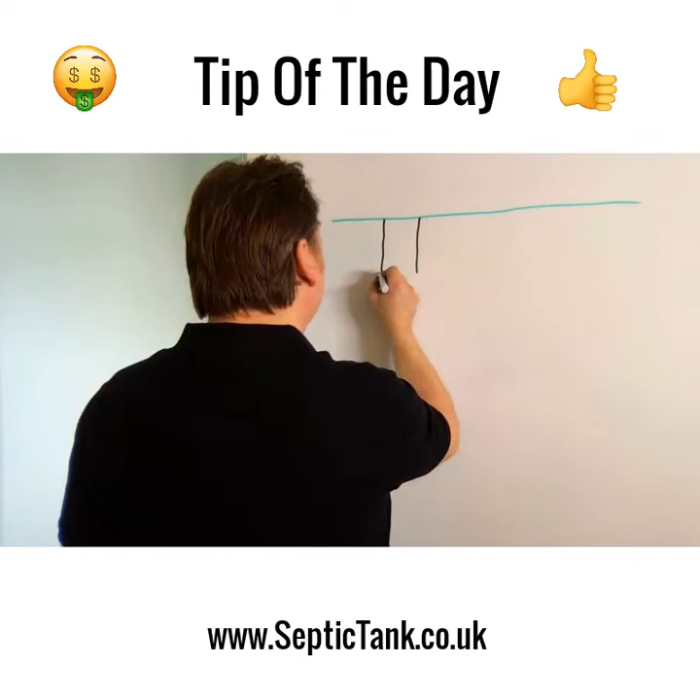Now let me show you this. Pretend that this line here is the grass, the ground that you stand on, okay? Now there's two types of septic tanks in the UK market. You probably recognize this one - that's called an onion shape septic tank. Now this one, probably recognize as well, it's called a bullet shape septic tank.

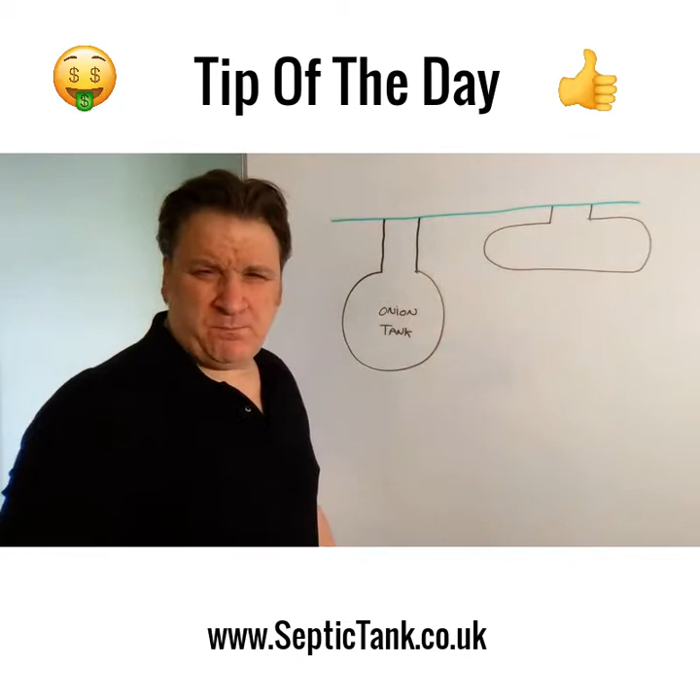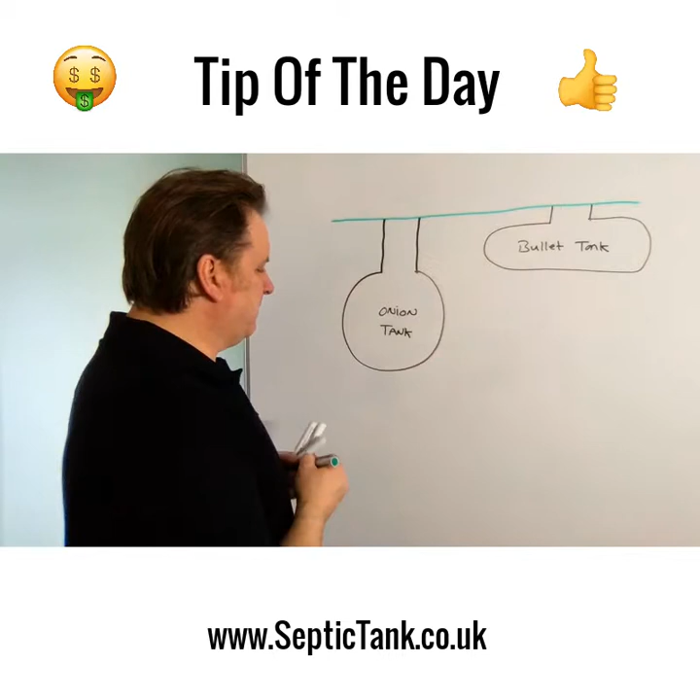So now let me show you the pros and cons of each of these tanks. Now this tank here, the pros of it are that it costs about 150 quid less than the bullet tank. So let me write down the pros. So it costs about - well, let's say, because prices can vary, but let's put this in perspective - up front it costs a third less to buy. No doubt about that, they're cheap to buy because they're made of fiberglass, so they don't cost a lot to manufacture. So that's one of the pros.

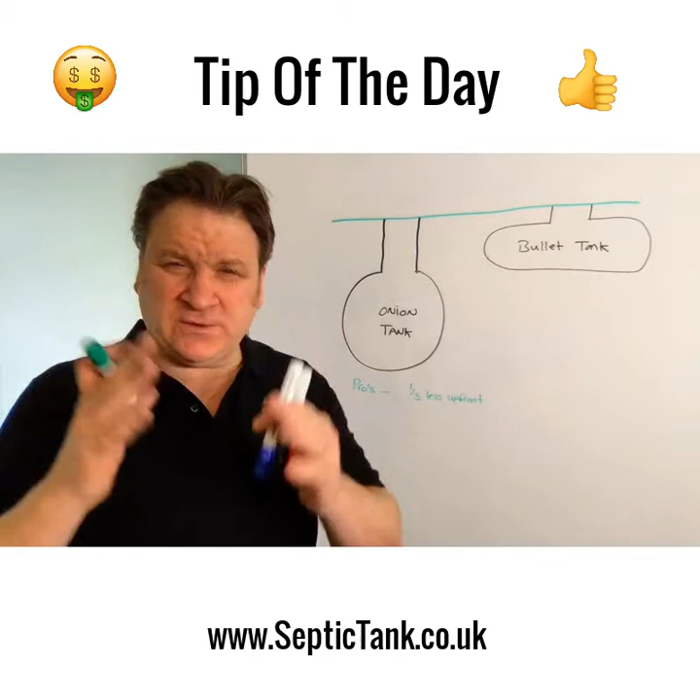And that is about it. I'm not kidding, and I'm not being biased here in any way, shape or form. So someone who's on a budget may think, okay, I can save myself 200 quid here, 300 quid, maybe 400 quid by going for a cheaper tank. Sorted, that's good, that's money. But it's false economy - let me show you why.

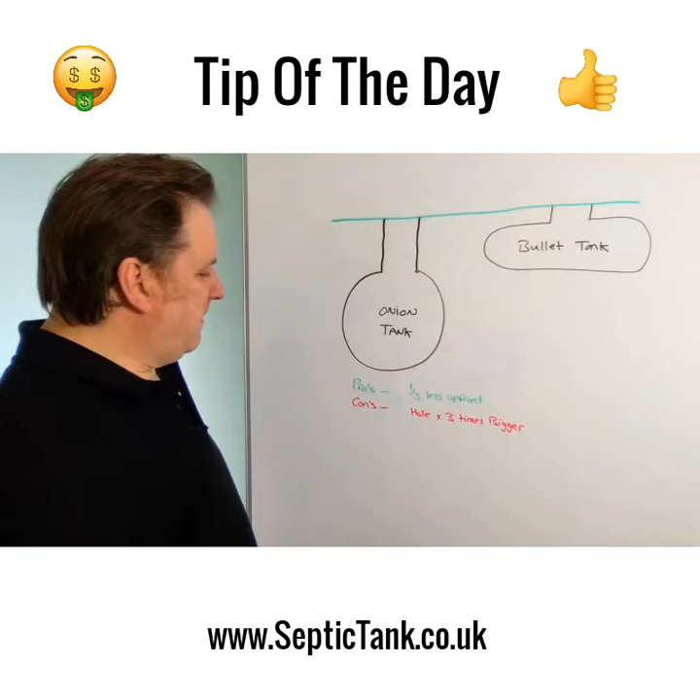Even though these are a third less to buy up front, the cons far outweigh the couple of hundred quid that you're going to save up front. The cons are: the hole is 3 times bigger, 3 times deeper.

So that means you've got to hire a digger. So for the bullet septic tank, you could get a small digger - a 1.5 ton digger, 3 ton. For this, you've got to use a 3 ton, a 5 ton, or a JCB. So suddenly that 200, 300, 400 quid you saved, now you've got to pay an extra 150, 200, 300 quid to get a bigger digger in.

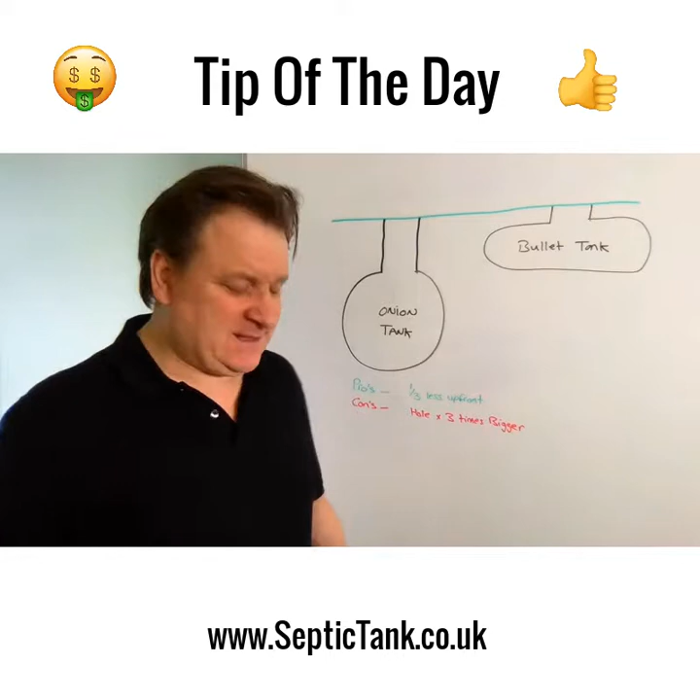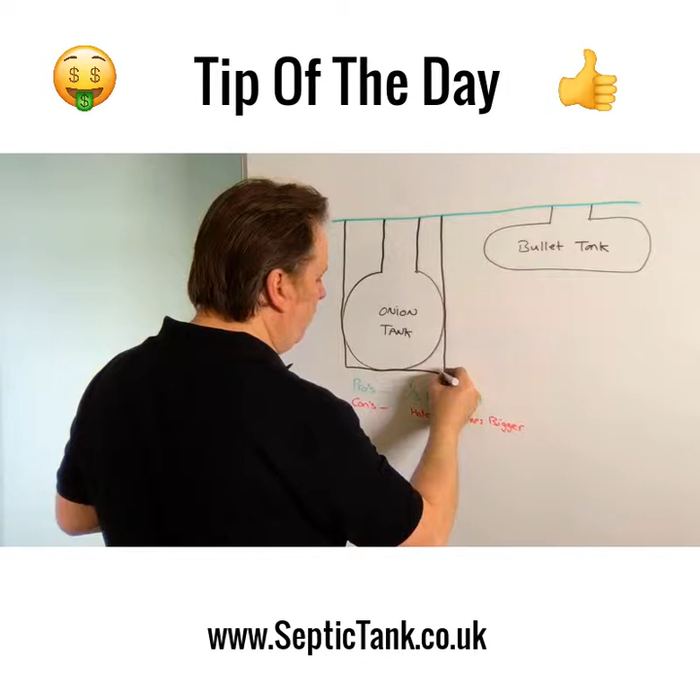But it doesn't end there. On these onion-shaped septic tanks, there's one thing you have to do with all of them, or the manufacturers will not warranty them - you've got to backfill them with concrete. Unless you do that, the manufacturers won't warranty them, and they're a pig to put in.

So let's say it takes 2 to 3 days to get one of these in as well. Now, to backfill with concrete can cost you anywhere from - flipping heck - 400 to 800 quid.

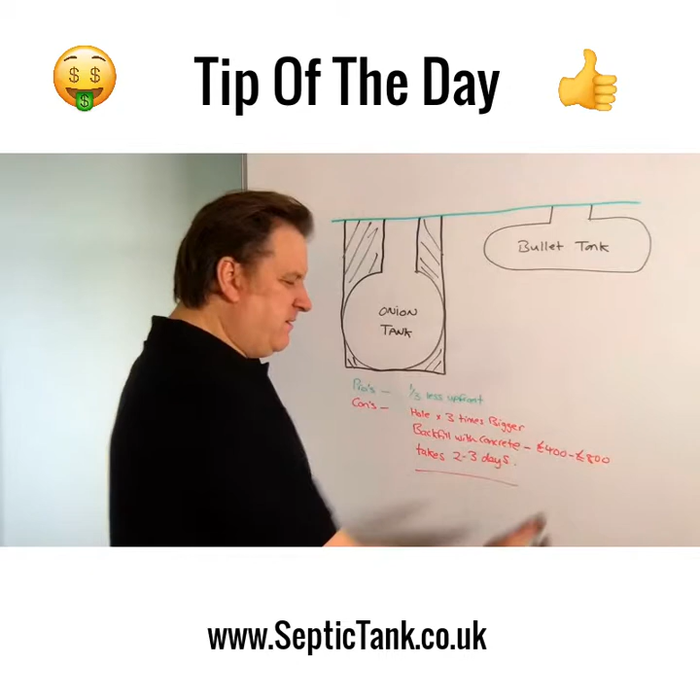So suddenly that 200 or 300 quid you've saved up front has now disappeared - it's been eaten into because suddenly you're paying out, let's put a mean average here, let's say 500, so suddenly you're paying out another 600-700 quid that you wouldn't have had to pay. Okay, you've saved 300 quid, but you've still paid another 400 quid on top of that.

So let's put that in perspective for you. Let's say this tank has cost you - let's compare the prices of both tanks - let's say this tank is going to cost you 899 quid, and let's say the onion equivalent is going to cost you 599. So that's an immediate saving of 300 quid.

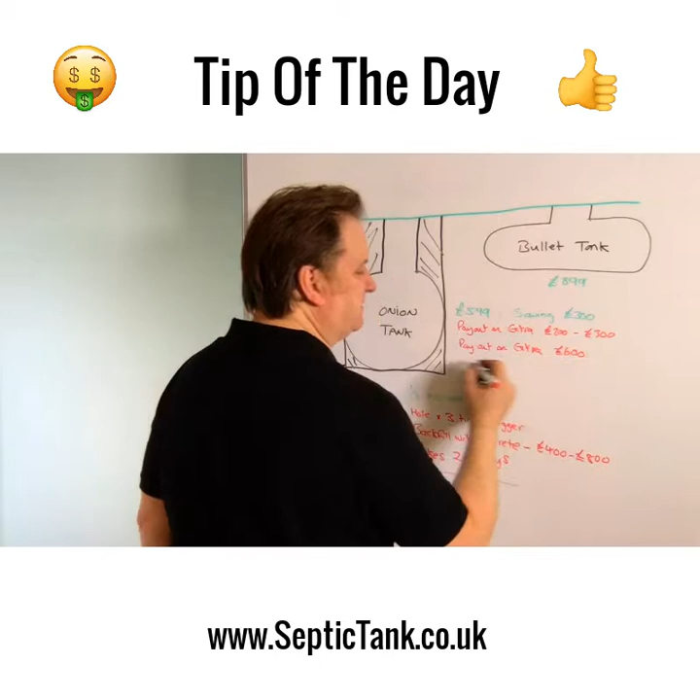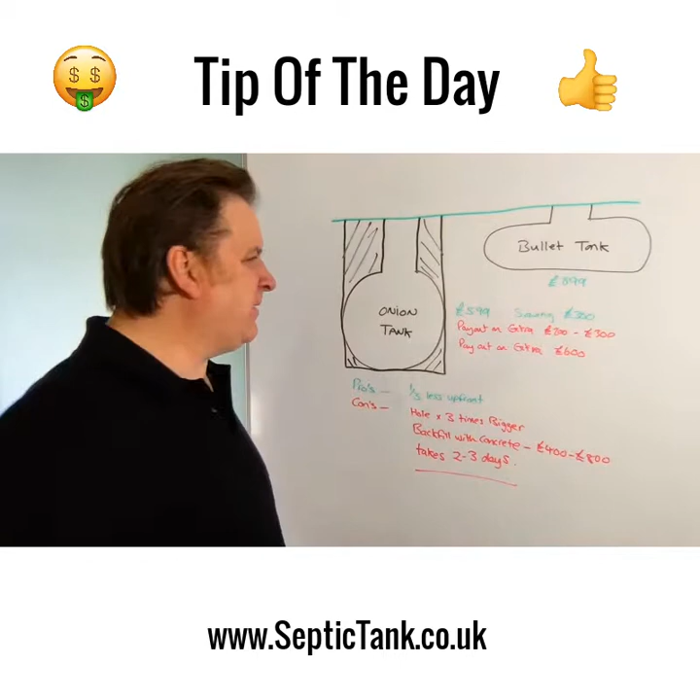That's not including the extra day or two of labour and all the hassle and costs of trying to install it. Now on the bullet tank, it's cost you 899, which is 300 quid more, but let's look at the pros here.

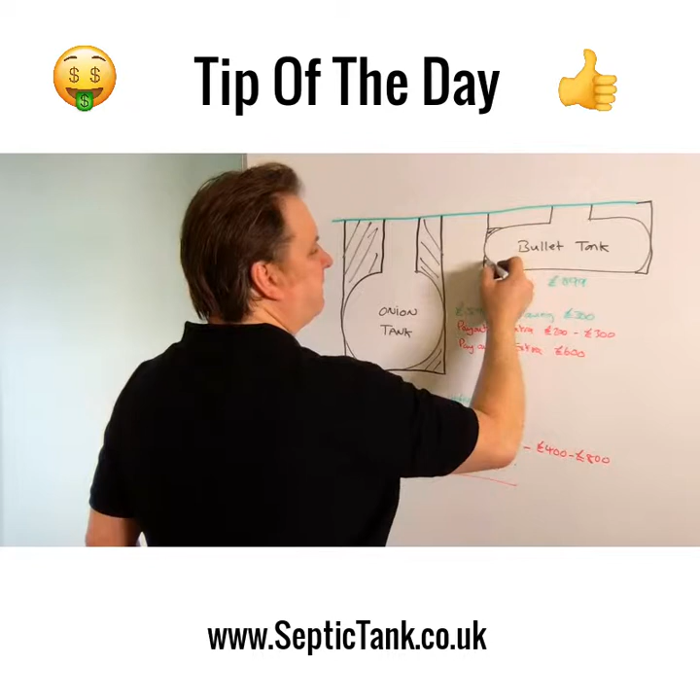Let's look at the pros. Number one, you only need to backfill with a few ton of gravel or shingle, that's all you need. Number two, it's two-thirds shallower than the onion tank.

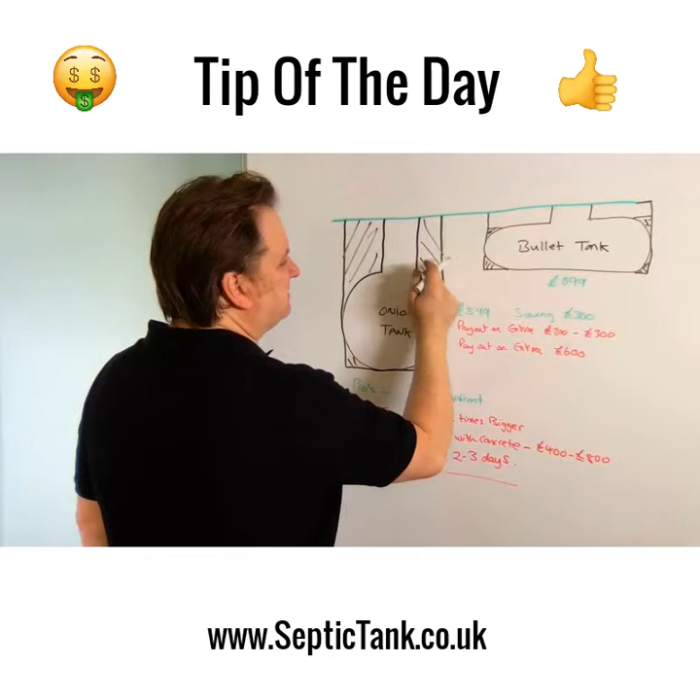Oh gosh, here's another one I haven't told you about. With these onion tanks, because it's so deep, the soakaway has to literally start a minimum of 3 to 4 feet below the grass. Man, the complications. It's bad enough having to go 2 foot down in the ground with the soakaway, never mind 3 to 4 to 5 to 6 feet.

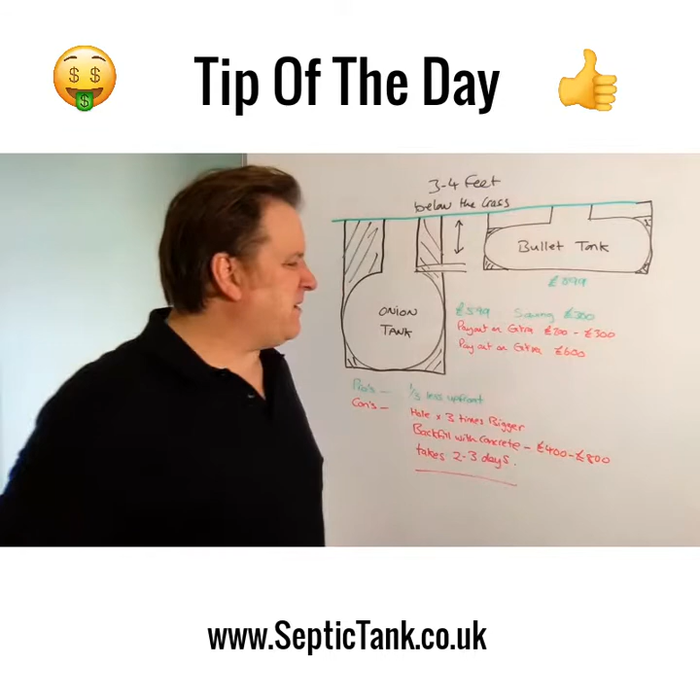And this is just a small to medium-sized onion tank. Once you start going deeper and deeper, the resistance gets mad and the bigger the soakaway has to go. So what I'm saying is that initial 300 quid you may have saved will cost you anywhere from 600 to almost £2,000 in additional costs because of the extra depth you've gone to put your soakaway in. Whereas on the bullet tank, the inlet pipe and the outlet pipe are relatively shallow, so the soakaway can start shallow in the ground.

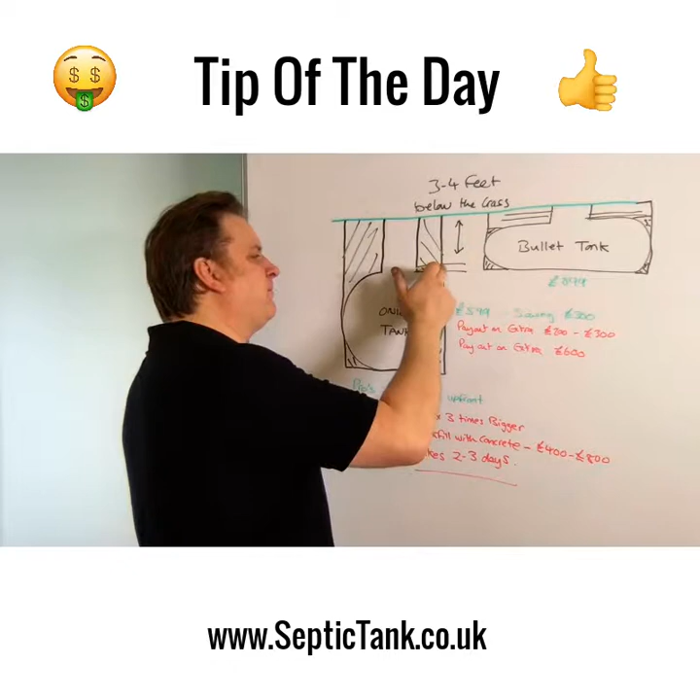So if you want a tip, don't think about that initial 200 to 300 quid up front in costs. It's the back end where you actually need to save the money - the total job, how much it's going to cost by the time you're finished. Because that's false economy, and people will sell these at 399, 499, but they don't tell you how hard it is to get in the ground, how deep your soakaway has to be. Don't do that. So that's a serious consideration.

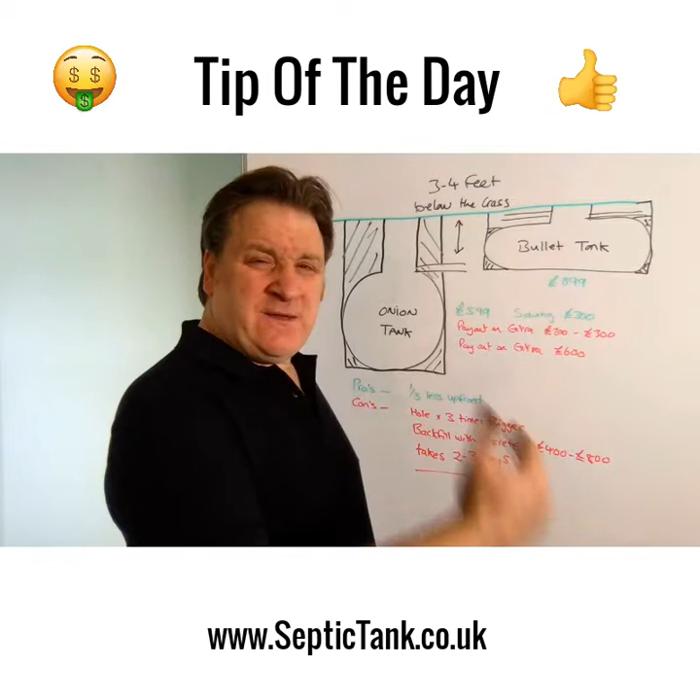But if you follow that tip, pay that 200 or 300 quid extra on, say, the bullet septic tank, then you'll save at least 1,000 to 2,000 quid on the back end. So yeah, that for me is tip of the day. You can't beat that tip.

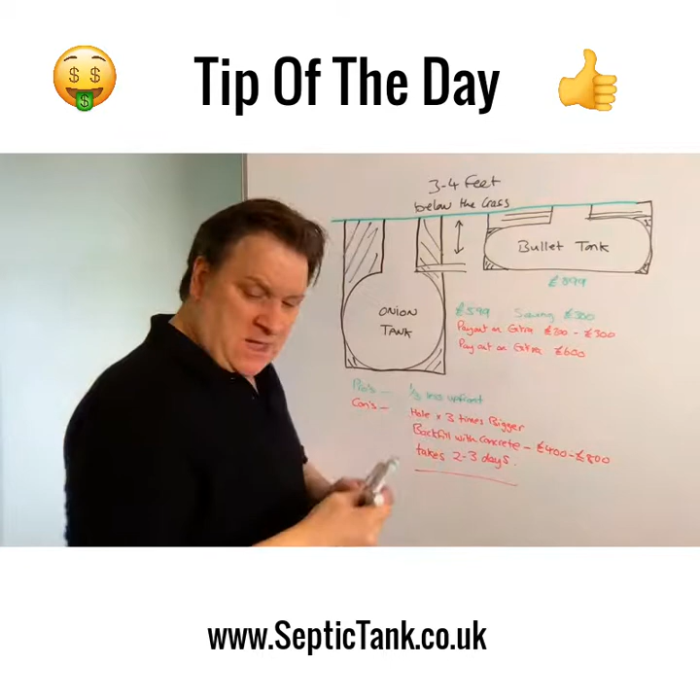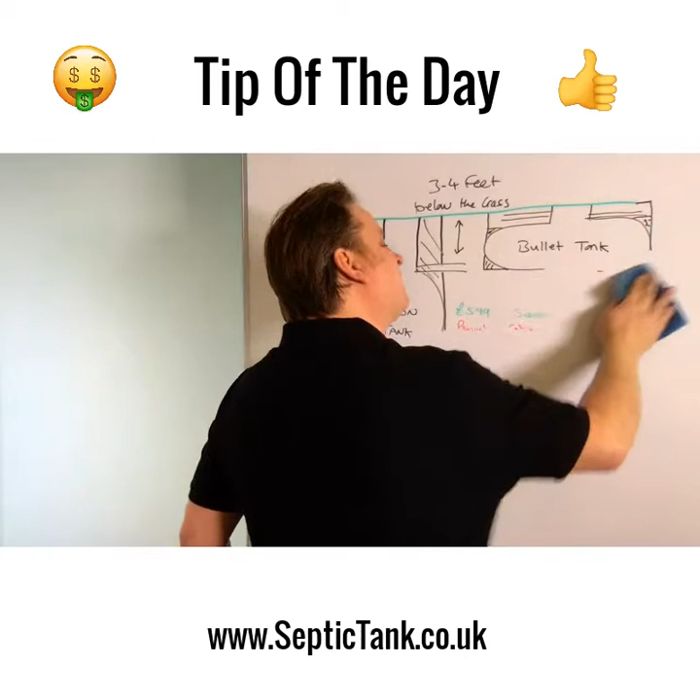That's an amazing tip. And it amazes me that people even still put onion-shaped septic tanks in, to be honest. People are just thinking upfront costs when they're buying it. But as I said, when it comes to them finally seeing how much the job costs in total by the time they've finished, they're really surprised. And if you're paying someone to do it, of course they're going to put an additional 1,000, 2,000 quid on the price it's going to cost to do the job. So it's madness and folly going for an onion tank.

Now, if you've got two bullet tanks, one's cheaper than the other, that's fine, do that - that's not false economy.